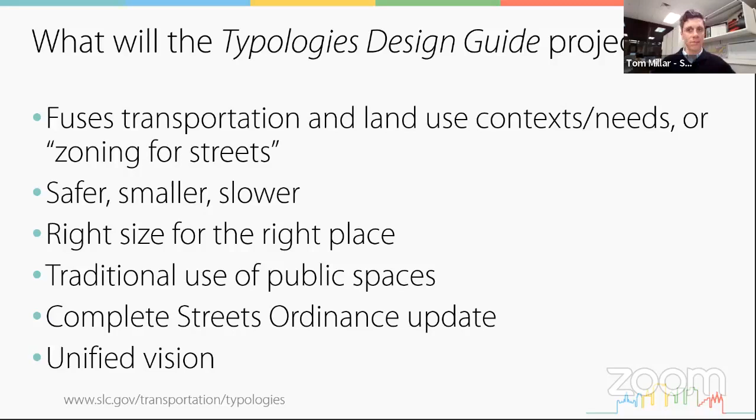Let me jump in and show you at a glance what's in this guide. This guide creates 15 new kinds of streets. That's pretty awesome, because right now we really only have about 3 kinds of streets that we refer to as transportation planners and engineers: big streets like State Street, medium streets like 900 West and 800 South, and small streets like a residential street such as 1200 West that we just looked at.

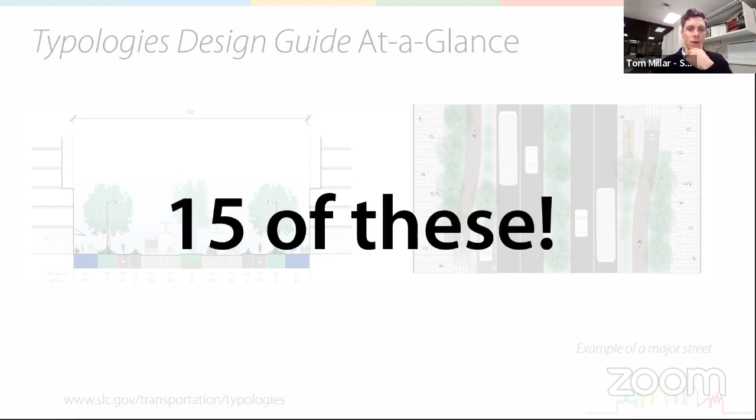But we knew that there needed to be more context for where these streets were and how they were designed. So first we started with these 5 critical functions of every street. And then we thought, well, what kinds of land uses or what kinds of contexts or districts might these streets be in, and how might they behave differently?

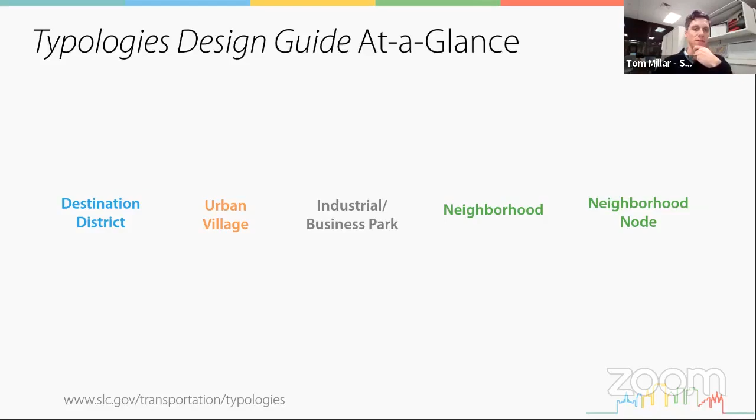So then we came up with 5 different types of places: a downtown, an urban village like a 9th and 9th area, an industrial business park maybe like Research Park or the warehouses west of Redwood Road, neighborhoods where all of us live, and neighborhood nodes, which are just these intersections in our neighborhoods that support laundromats and coffee shops and carnicerias.

Then we said, okay, now that we have 15 kinds of streets, let's apply them theoretically, one to each street in Salt Lake City, so that we know which street is going to be applied where, if and when that street comes up for reconstruction. So you'll see this as we get towards the end, an opportunity to engage with this map, and I'll show you a little bit more about how to use it.

You'll see an opportunity to engage with this map, and I'll show you a little bit more about how to use it.

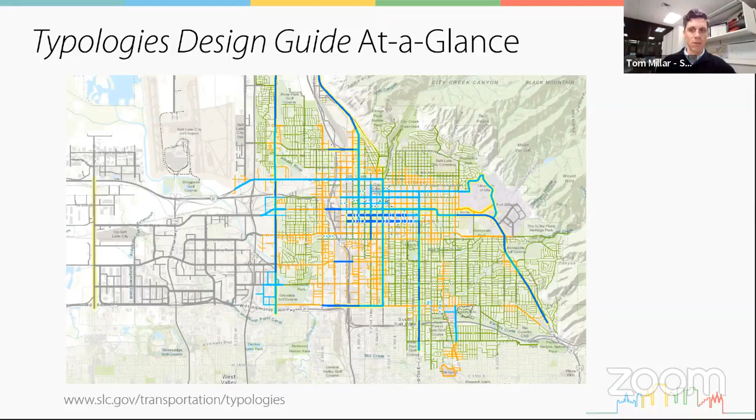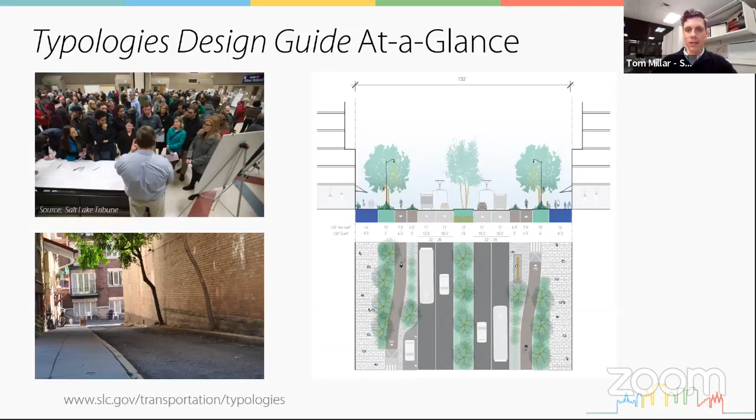And then obviously in the future, we will take these just as our starting point for our community conversations, not as prescriptive, where we have to do this. This is absolutely what the city is going to do, no matter what you tell us. This is really just the first step of many in determining what our streets should look like when they come up for reconstruction. It'll begin the process of the Complete Streets Ordinance update and create that unified vision.

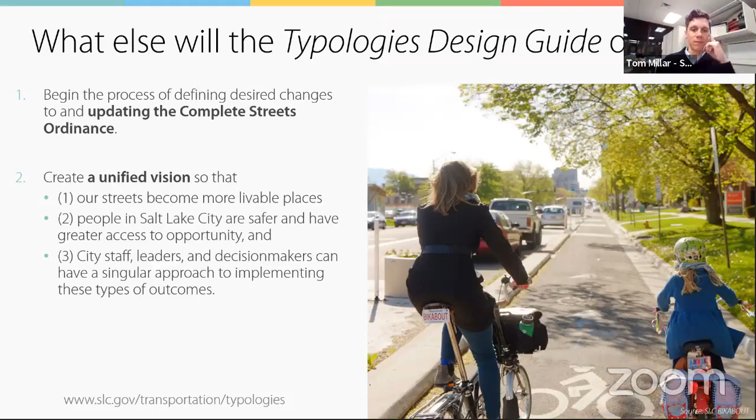So let me tell you a little bit more about how we got here, really briefly. We met with each of the Salt Lake City departments and divisions before we even started on the project, and we said, what can the streets do better for you, and what can you do better for the streets? We took all of those priorities.

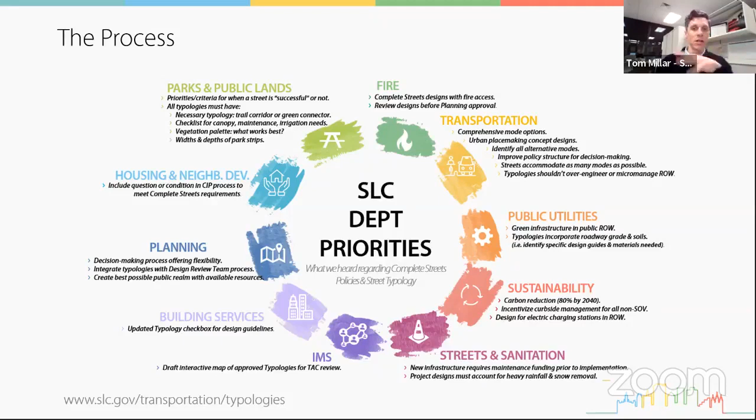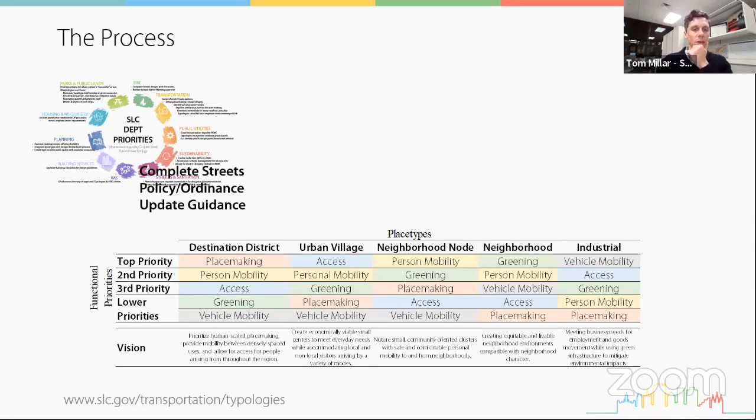We took some policy, ordinance, language guidance from our consultant for this Complete Streets. We looked at what priorities would differ based on the different place types. Obviously, we looked at these 5 priorities.

We looked at transportation and other plans, the pedestrian and bicycle master plan that I mentioned, the transit master plan, UDOT's plans, UTA's plans, and made sure that we were incorporating all of those, as well as the community master plans, the West Side master plan, Sugar House master plan, Avenues master plan. There are dozens of them.

We also made sure that we had some performance measures so that we knew once a street was built, if it was really meeting the goals of this Typologies design guide.

We collected these critical dimensions from each of the Salt Lake City and UDOT and UTA partners to make sure that we had the right square footage, the right amount of space dedicated to each mode, and that we weren't just guessing, or putting something in there that wasn't going to fit when push came to shove.

We've also been working with UDOT, and we have not shied away from applying the typologies to UDOT streets, and we've been working with them to make sure that that assignment is appropriate and acceptable to them as well.

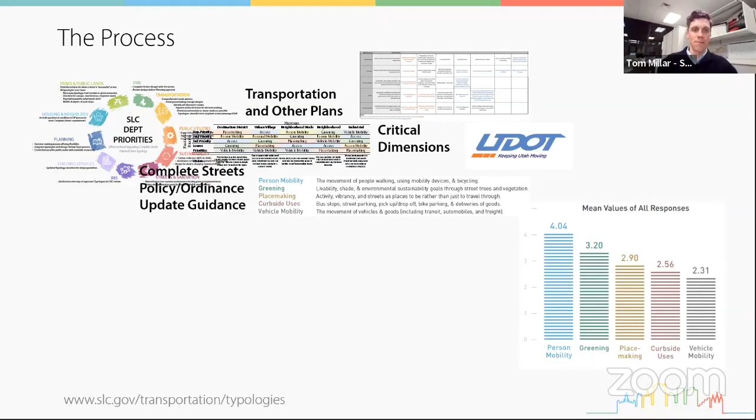We've based a lot of this design off of what we've heard from you, the public, over the last couple of years. This is a really interesting nugget of information we got at the beginning of the project in the first round of public input. We asked people, what are your top priorities? If we changed our streets, what do you think should be prioritized more than it is now?

And far and away, people who drive, people who don't drive, older people, younger people, people who speak English, people who do not speak English, people born and raised in Utah, people who are not born and raised in Utah—all of them answered that person mobility, or walking, biking, socializing, was the number one priority for a street designed differently in the future.

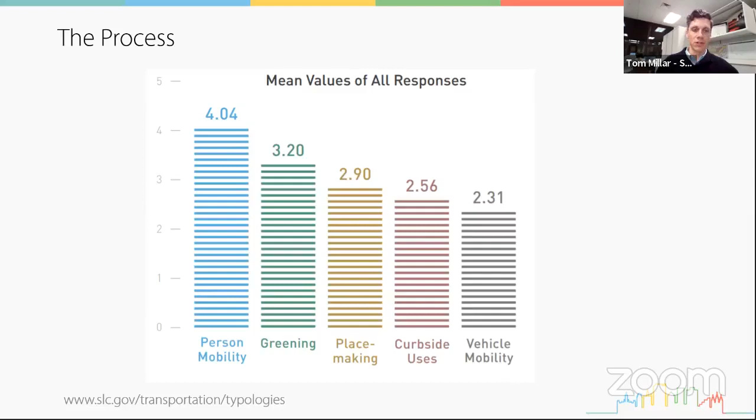This was how they answered according to different places in their life: near their home, near their work, near schools and parks, near shopping. You can see that it trickles down, and vehicle mobility is the lowest priority. Now, that does not mean there will not be cars, car lanes, or turn lanes or things necessary for that transportation infrastructure in our future streets. We still will. It just won't be the top priority at the expense of all these other priorities.

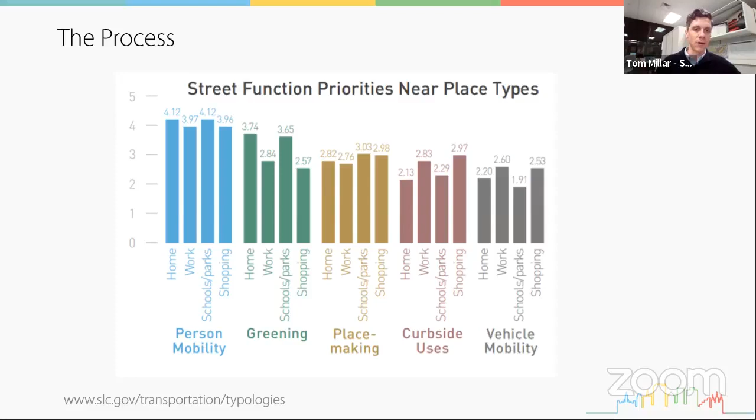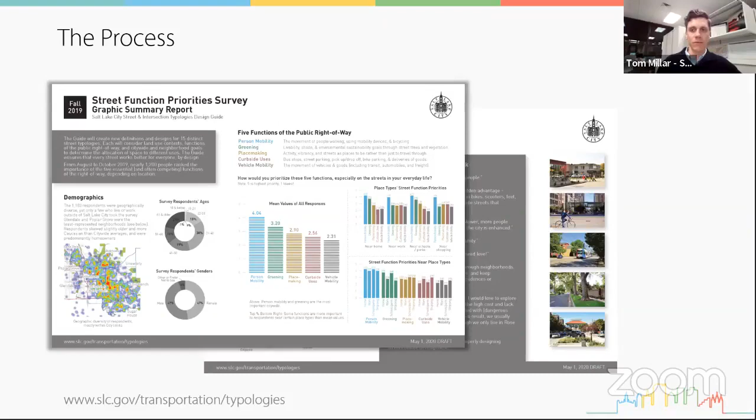You can read more about the input we got during the first and second rounds on the webpage, which is at the bottom of this slide and all the future slides. So all of those things together, we put them in a big hopper, and that spit out these 15 typologies we've come up with. Some of them are place-type specific, and some are place-type agnostic.

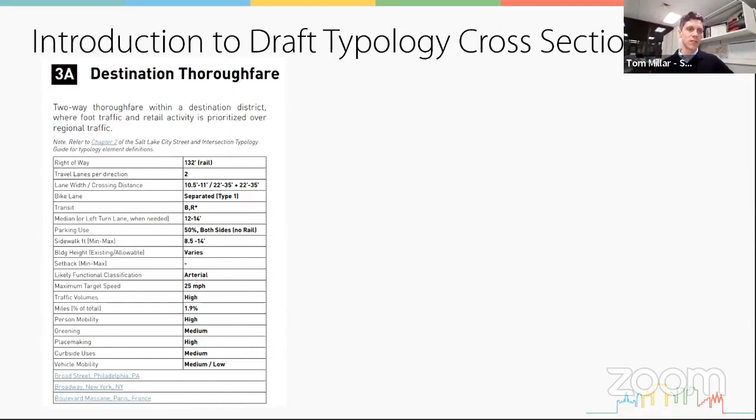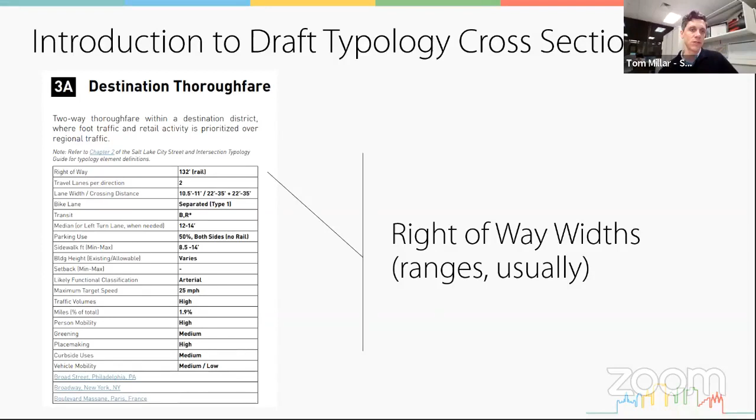I want to show you a little about what you'll see when you go to the webpage to review these street typologies. First, you'll see this table, and it has a lot of info. It has the amount of right-of-way, or public space to be used for these streets—that's basically between property lines—and the different elements within that right-of-way.

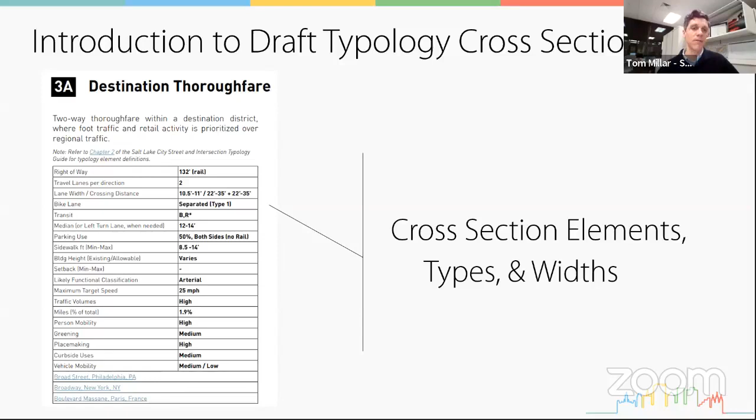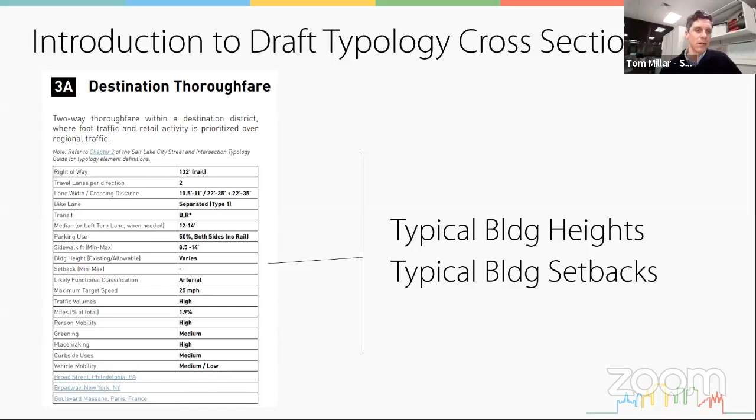How many lanes? How many bike lanes? What kind of buses or trains are there? Is there a median or a left turn lane? And what are the widths of the lanes? Then you have your typical planning and zoning information, like the types of buildings and how far back from the street they are set.

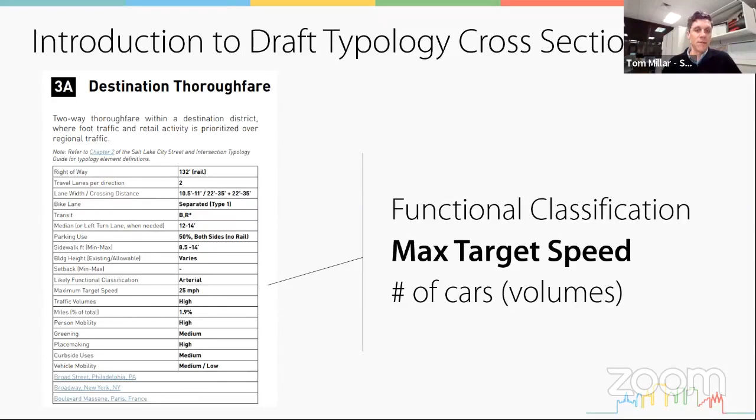You have a functional classification, which is really just transportation planner-engineer speak for: is it a big road, a medium road, or a small road? You have a max target speed, which is that concept of design speed I mentioned earlier. This is the maximum speed people will drive based on the design of that street—it's not the speed on the speed limit sign, it's the speed people will naturally drive even if there were no speed limit signs at all.

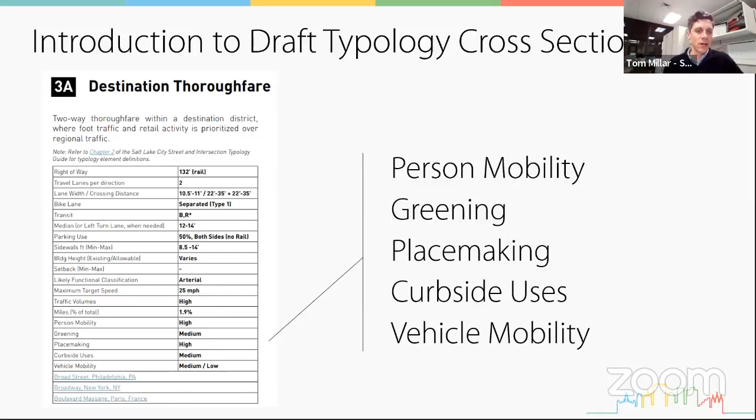And then you also have number of cars, and the priorities of each of these street functions that I mentioned earlier—they do differ typology to typology, because sometimes one is more important than in another context. And then you have some examples, both domestic and international.

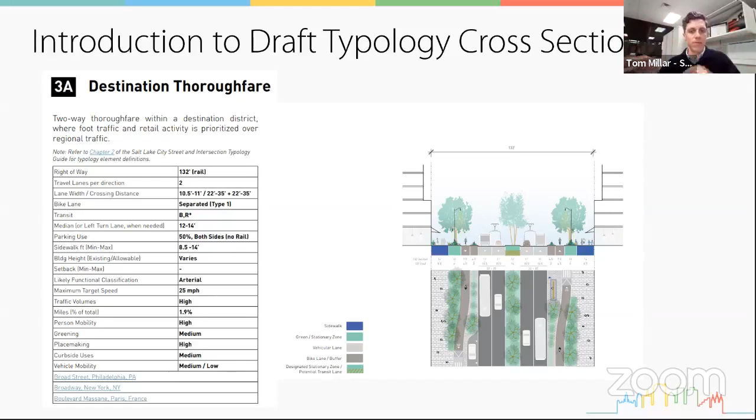So this is what you'll see on each of these 15 typologies: that info table, and then the design you can see on the right. You can see it both as a person-view cross section, and also as a bird's eye view from above.

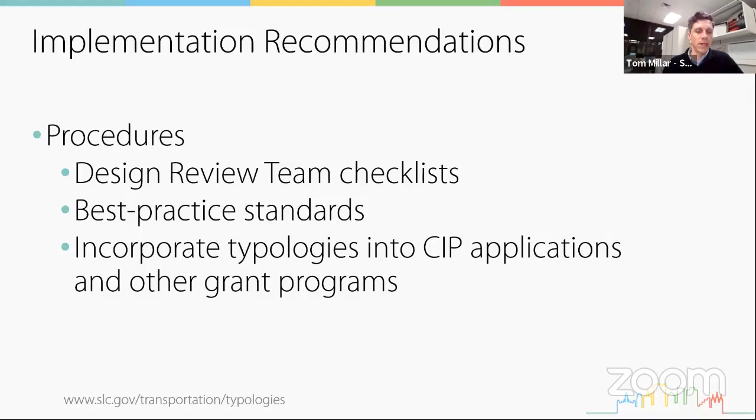In addition to these designs, we also have some implementation recommendations, practices, procedures, and policies that are more internal to the city teams, so that we know what we're doing and how we should do it, and so we can deliver these projects to you, the public. Sorry, this was the last slide on those policies.

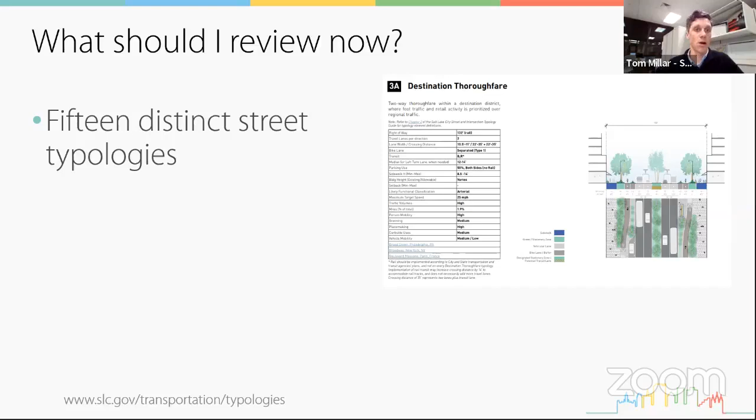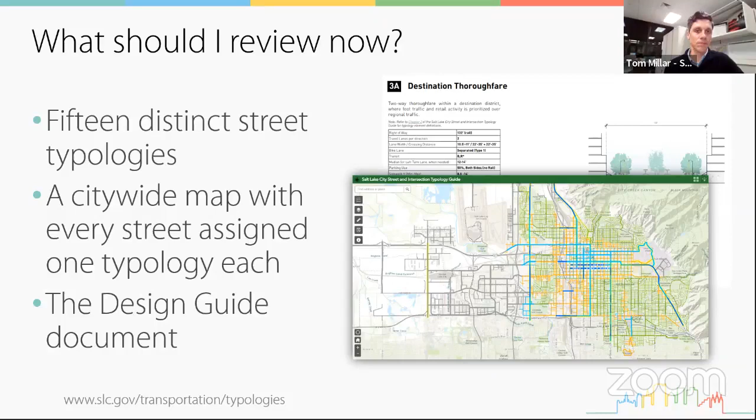So what should you review now? We hope you already have, but if not, the soft deadline for the public input period is tomorrow. There are these 15 distinct street typologies, a citywide map with each street assigned one typology, and the design guide document itself that combines all of this into one place. Again, that's tomorrow, the end of the third round. So here's where you can go to learn more and provide your input.

There's a survey and there's also a map, which we'll be looking at a little bit later on today. There's the design guide, the typologies, the map, and then a survey at the end. You can find all of that here at this website.

That concludes my overview of the why and the what behind the project. Now we're going to do some fun interactive things to make sure you can really understand and visualize what these changes might look like in the future, whether that's next year or 50 years from now. We don't know, but we want to help you visualize that.

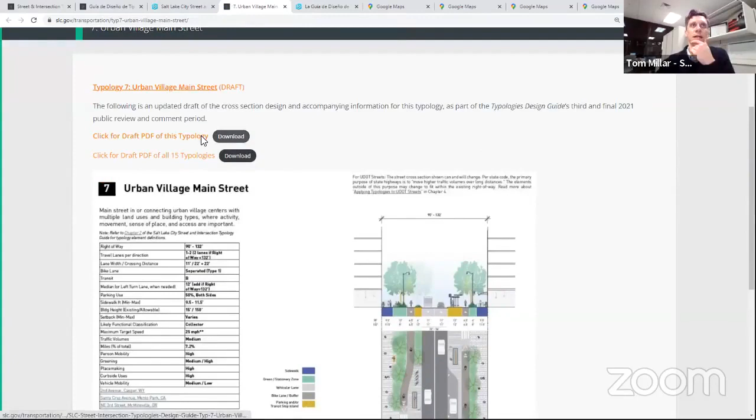Let's make it a little bit bigger so we can click on the PDF of it. Oh, I don't want to download it, I just want to look at it.

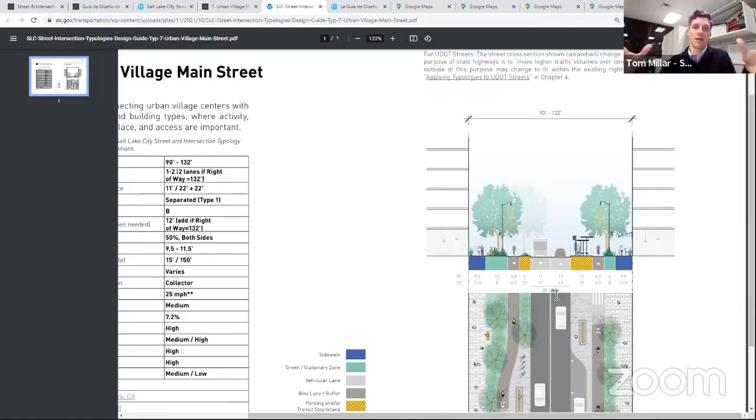What we see here is that the design shows just 1 lane in each direction, but the table on the left says there can be 1 to 2 lanes per direction, and 2 lanes definitely if the right-of-way is 132 feet wide. So the total roadway width can be between 22 and 56 feet wide. That 22 would be 2 11-foot lanes, and the 56 would basically be 4 11-foot lanes plus a median. So if we go back here, add in the 12-foot median, and you get 56.

This gives us the flexibility to use this urban village main street typology in areas like Sugar House or 9th and 9th, or even some areas east of downtown, 9th West, to give flexibility. If we need 2 lanes, great, we probably have space for 2 lanes. If we don't need 2 lanes, then great, we can have more space for other stuff. This is one of the typologies that has the most flexibility, because a lot depends on the context of the roadway.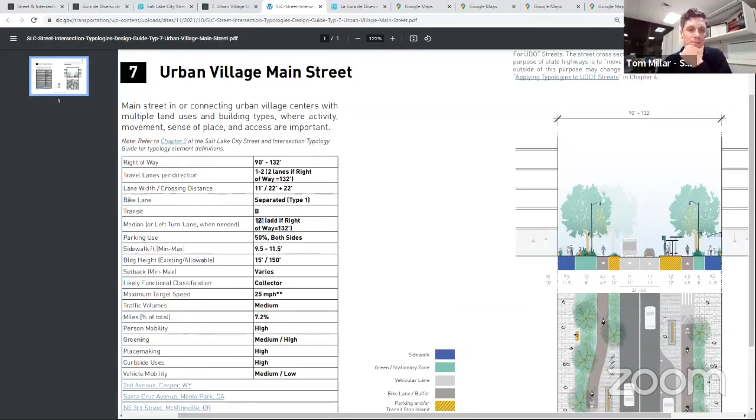Thank you. I think going through these examples is really useful, especially for showing people how to interact with the map and use all the information we've dropped in their laps.

Let's take this opportunity—if anybody has a suggestion of a section of street or an intersection they'd like Tom to walk through and put up on the screen, submit your request in the chat and we'll take a look. Otherwise, I'll recommend a couple we can look at to keep the ball rolling.

I'm on Salt Lake's west side, so I'm going to pick a west side address. How about 1050 South, 1400 West? So south of the 9 line, west of Parkview Elementary. Is that right?

Let me share my screen again and we'll go there and look at some designs. Starting from Sugar House, let's zoom out, go over here. There's Parkview, 1400 West—I'd say this is about 10th South, out there. Okay, let's click on it.

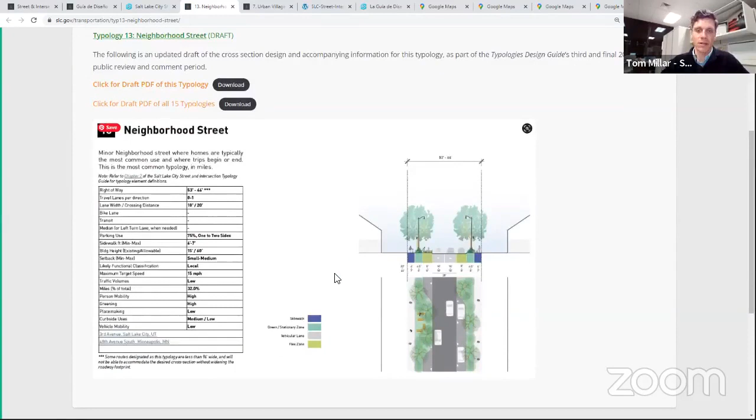Thanks, Amy. This is a neighborhood street, so this is typology number 13. Let's take a look—this is our most common typology, a street you might find kind of anywhere in a residential neighborhood. Let's click on this to make it bigger. So this is what 1400 West could look like. You have some flexible space on the outside for either parking or for a wider park strip, wider sidewalks so it's more comfortable to walk with your family or pass people, and a healthier, wider park strip to encourage healthier trees.

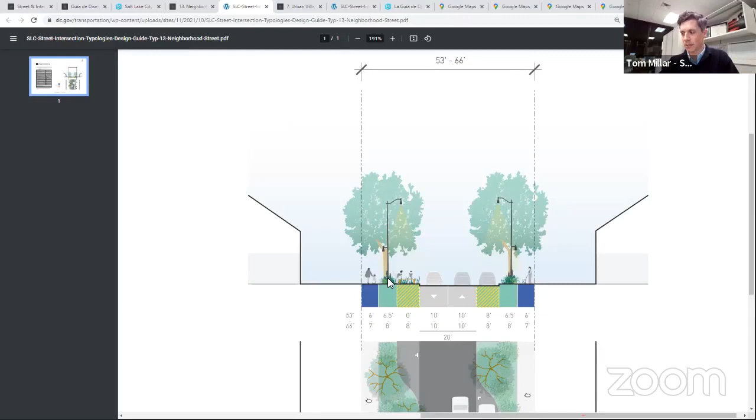I think maybe the best example of this that we already have in Salt Lake City is 3rd Avenue in Federal Heights. Let me go there.

So many of the typologies are actually based on streets that we already have in Salt Lake City—they're not foreign concepts. Oh, that's not good. Oh, I wonder what's happening to Street View.

Maybe not. Okay, so this is 3rd Avenue—you have those 6-foot sidewalks, 7-8-foot park strips, parking on both sides in this case, and enough room to drive in both directions. This matches what we desire for all residential streets, or almost all residential streets that this typology is applied to in Salt Lake City. Kind of a cool example we can look at.

That's great. Thank you. Thank you.

So Janet has posted a follow-up to your response to her earlier question. I think there's a really good point in it that may be important to explore, as to how you've formed these typologies and are making these recommendations. Janet notes that Salt Lake City is going to continue to grow. We know that, and based on the realities of the infrastructure at present, there may be needs for expanded car infrastructure, like volume capacity, and it may not be feasible for everybody to transition to cycling or mass transit. So based on your recommendations and these typologies, it does feel like maybe your office wants to push people in that direction.